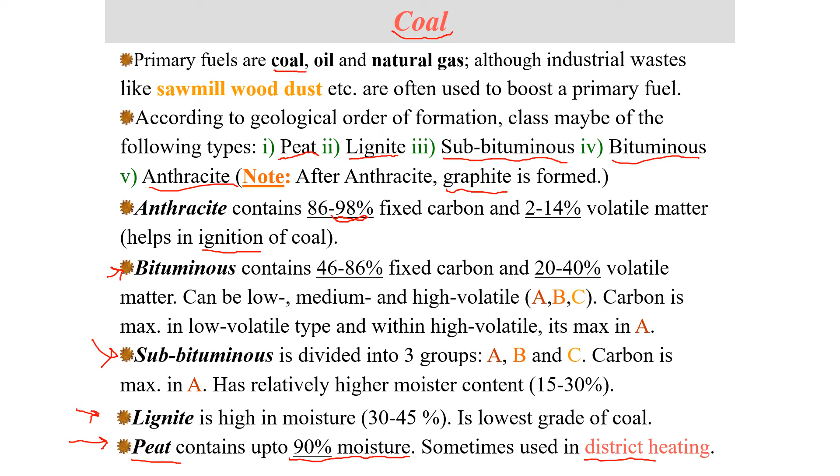So this is peat. If it is dug, it is used for district heating. Lignite is something which is used in steam power plants, but it is still a very poor quality of coal.

It then goes through processes of dehumidification, and it is used in a lot of industries. Pakistan generally has lignite and subbituminous type of coal, commonly being mined here. So the coal content is here, but it's not of a very good quality, and this kind of coal also produces a lot of sulfur and other harmful products.

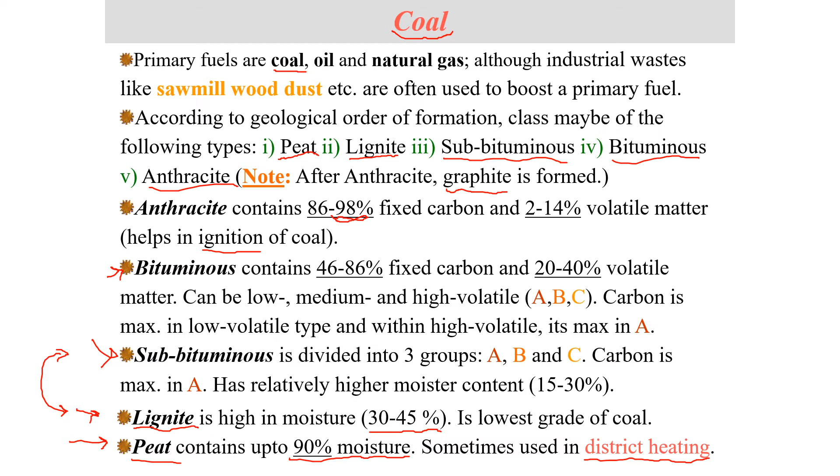So you can see the different types of constituents which are present in coal. The primary thing which defines coal is fixed carbon. If a substance does not have fixed carbon in it, it is not coal. So generally we define coal as starting at 30% carbon, which is lignite.

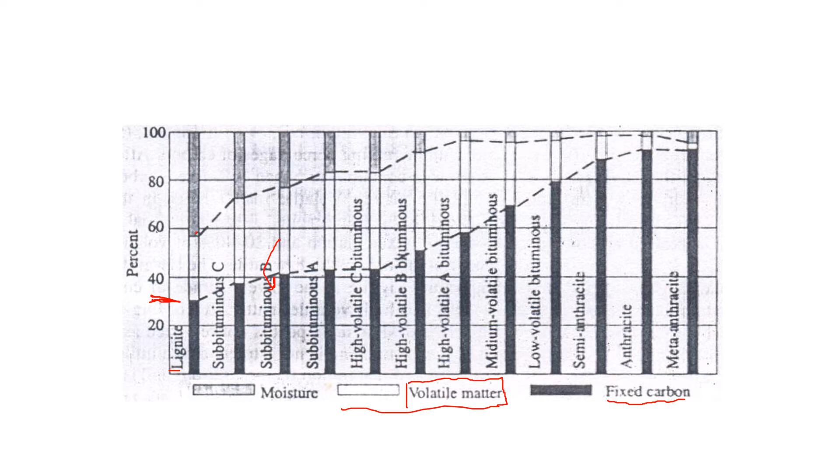Then the second part is volatile material. Volatile material is something which is combustible, like sulfur compounds or carbon compounds, but they are present in a separate arrangement. There could be hydrogen in it, or anything else. These volatile materials actually help burn the coal, so when you ignite this material, it ignites the coal as well.

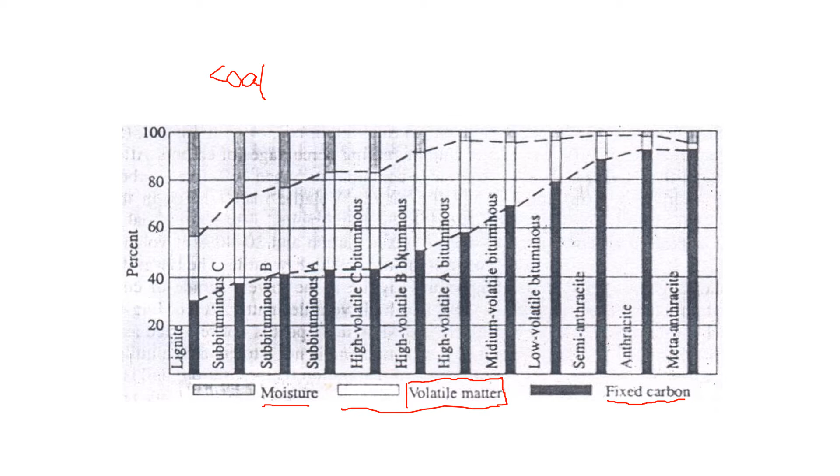And lastly, you have moisture. Moisture is present in coal because coal actually comes from trees. So any tree or organic material, any living material, has moisture in it. Moisture is present, and it starts to decrease as the age of the material starts to increase.

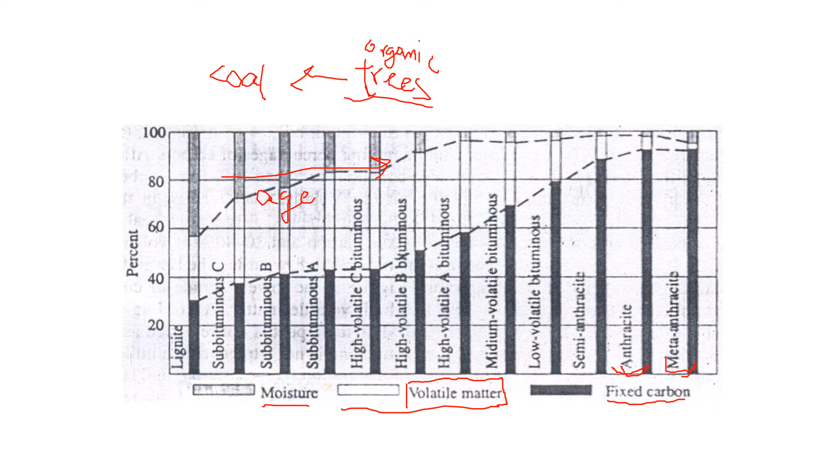So you can expect anthracites and meta-anthracites to have a lot less moisture content, because a large percentage of the material is carbon. And you can expect the low quality coals, like lignite, to have a lot of volatile material and a lot of moisture as well.

So in these cases, you actually need to put these in a dehydrator or dehumidifier, and you need to remove some of the water content, because this water content will actually restrict combustion in the furnace as well.

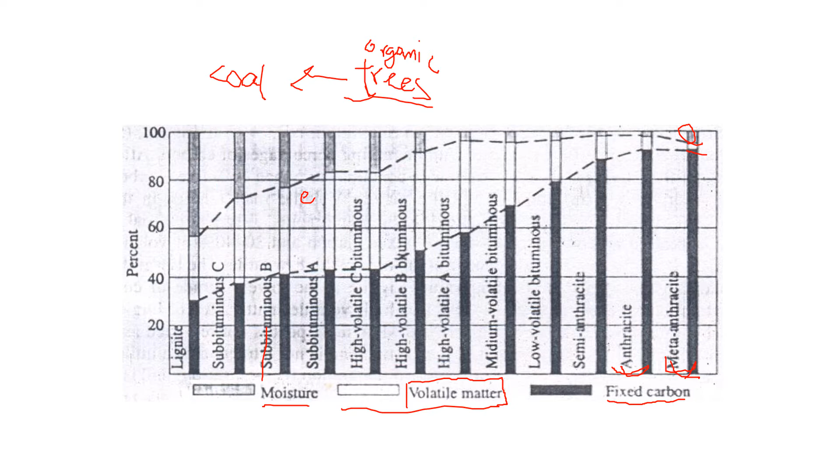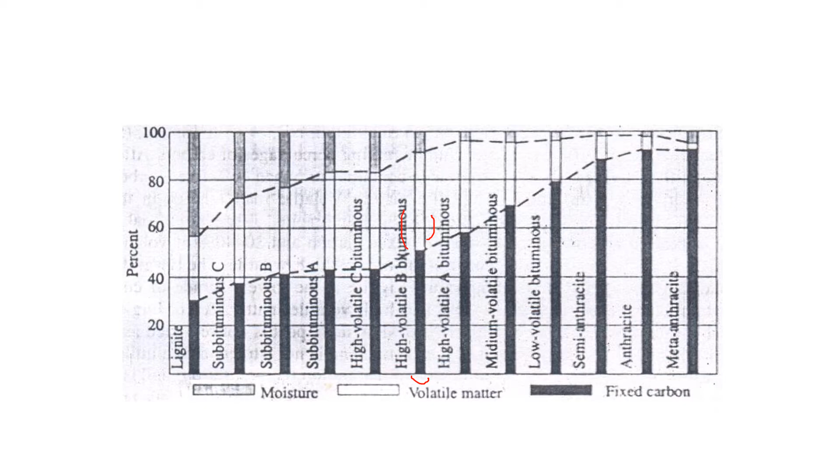So when we acquire a new shipment of coal, we are interested in how much carbon, volatile material, and moisture is in the coal. So what we do is we analyze the coal for different materials. There are two types of analysis: one is the proximate analysis, one is the ultimate analysis.

Proximate analysis you have seen earlier as well. It was how much fixed carbon, how much volatile material, how much moisture, and how much ash.

As I've talked earlier, volatile material is not fixed carbon, it is not elemental carbon, but it is something which is also easily burning in the system. For example, it could have CH4, or other material present in the coal that is not fixed or elemental carbon, it could be hydrogen or anything else.

Moisture is simply H2O, you know that. And ash is the residue which is left after you burn coal. When you burn a specific amount of coal, all the material left in the system is ash, and you have to remove that ash when you need to refill the coal.

This is the easiest way of finding out how much of this coal is ash: you just completely burn this coal at 720 degrees Celsius. 720 degrees Celsius means all of the moisture will be evaporated, all of the volatile material will burn, and all of the fixed carbon will burn as well, leaving only ash in the system.

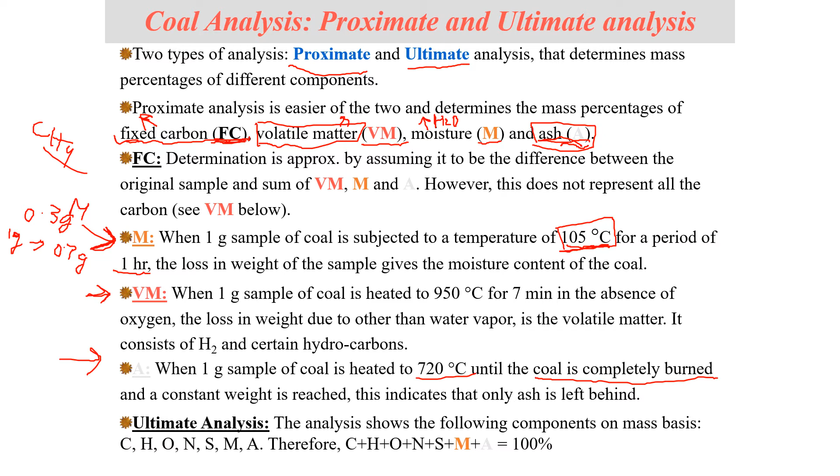When you want to find out the volatile material inside this coal, you take this sample which has lost all of its moisture, and you put it at 950 degrees Celsius for 7 minutes in the absence of air. That is important, because if you add oxygen to it, the coal will burn and you will lose both the volatile material as well as the fixed carbon. So when you remove oxygen from the system and only heat it at 950 degrees Celsius, the volatile material evaporates and goes out of the system.

When you have taken out ash, volatile material, and moisture from the system, then you just get the fixed carbon. So you can see that if you take out ash, moisture, and all of the volatile material, then you are left with carbon, fixed carbon, in the system.

Up till this point, this was proximate analysis. In proximate analysis, we are not concerned about what is the composition of this volatile material. But in ultimate analysis, we are concerned about the different materials. So now we actually find out what the molecules were and what percentages they have. We just talk about moisture and ash, although you can separate this moisture into hydrogen and oxygen as well.

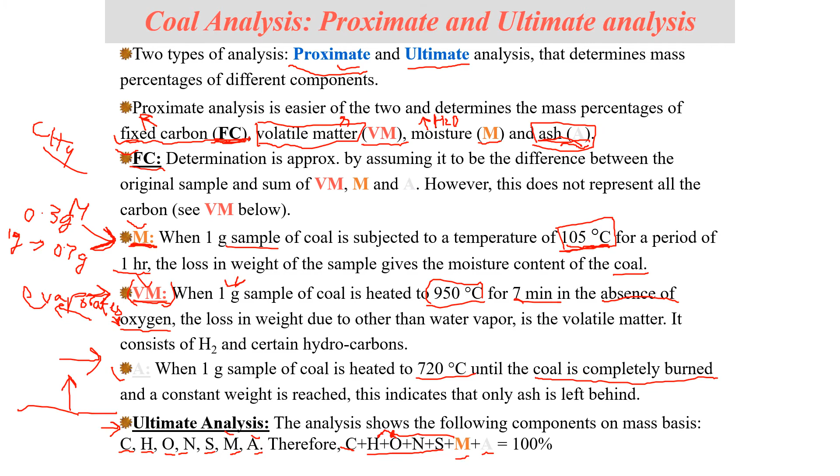So now when we have the composition of coal figured out, we are interested in the combustion equipment for burning that coal. We generally have four types of furnaces for coal: fuel bed furnaces, pulverized coal furnaces, cyclone furnaces, and fluidized bed furnaces. We will talk about what their constructions are like and how the name tells us what the combustion process will be like.

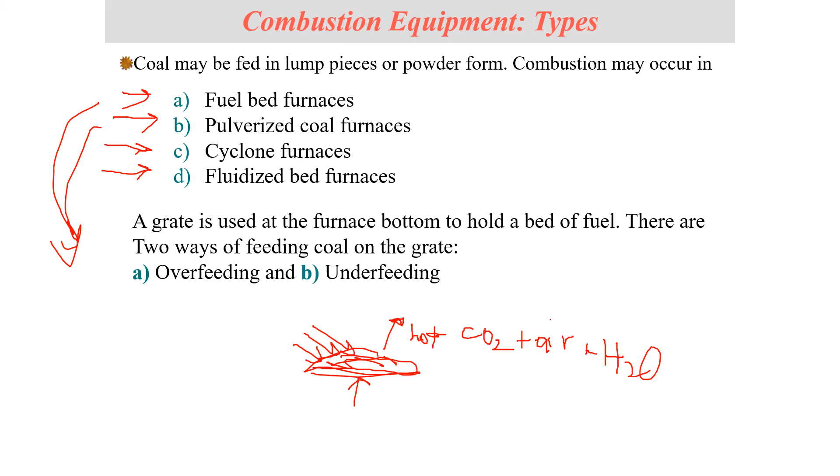In a fuel bed or pulverized coal furnace, we have a furnace bottom, like a bed, and we are just dumping coal over it. You get fresh air, and the combustion happens here, and you get hot CO2 plus air plus other components like H2O, whatever you have, plus etc etc, but mostly carbon dioxide and the excess air you get.

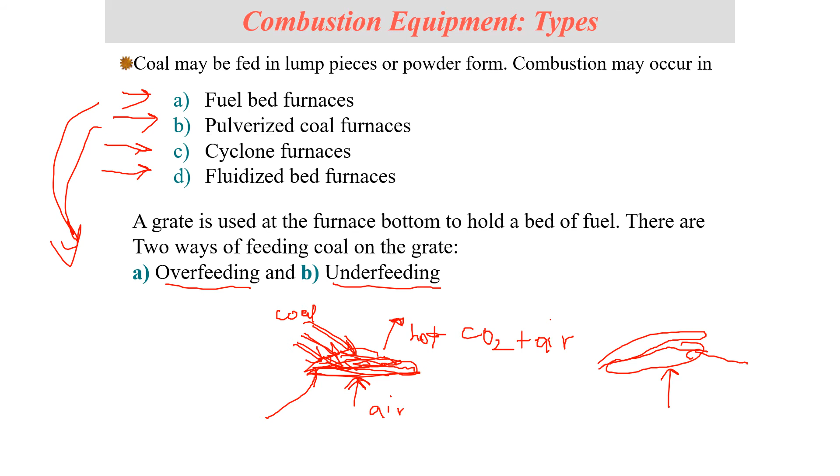If you are dumping this coal over an older bed of coal which has air passing through it, and you dump fresh coal over this old bed, this is called overfeeding. And if you try and ram this coal under the bed of old coal that has already burnt in the air, adding fresh coal under this bed, this is called underfeeding. There are different mechanisms for both overfeeding and underfeeding, which we will check later in the slides.

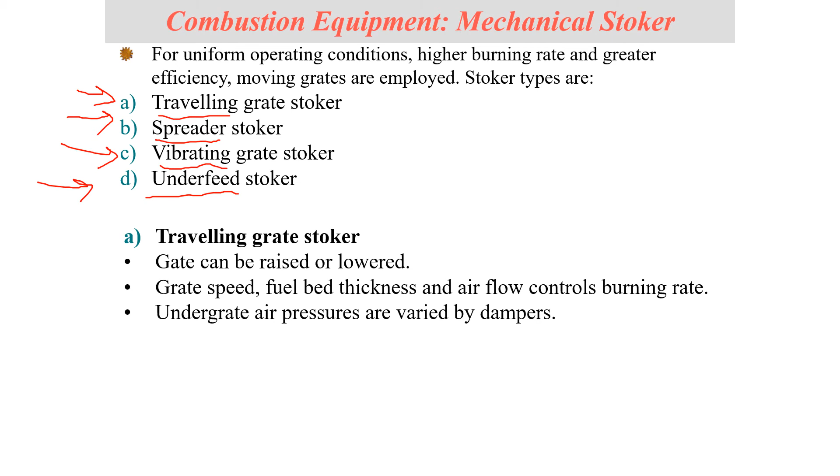Now we will start with the mechanisms for feeding coal. The first kind is called a mechanical stoker. There are different types: traveling grate, spreader stoker, vibrating grate, and underfeed stoker. Underfeed is the example where we try to add coal under the bed of existing coal, so that air interacts with the fresh coal before it passes through the older layers. All the other examples, especially the traveling grate, the spreader stoker, and even the vibrating grate, are all overfeeding examples, as you will see in later slides.

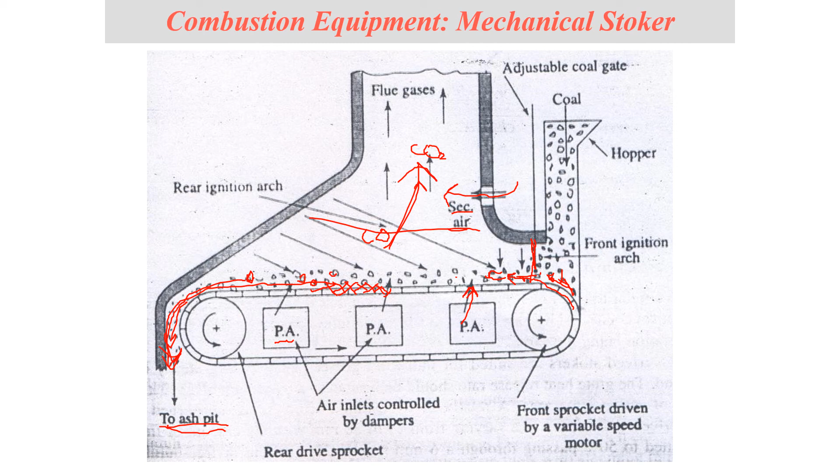Also, it allows some of the ash to flow into the flue gases as well. So this is a very simple process, but it is not a very modern design, and it does not allow you to vary the speed of combustion by a lot. This is just a very specific system which is a little inefficient as well.

Then we have another kind. You can see that in the last design, you will have a large quantity of coal at the initial part when the conveyor is moving, and at the end part, the air will not find a lot of fresh coal to actually burn. So here, there is another type called a spreader stoker.

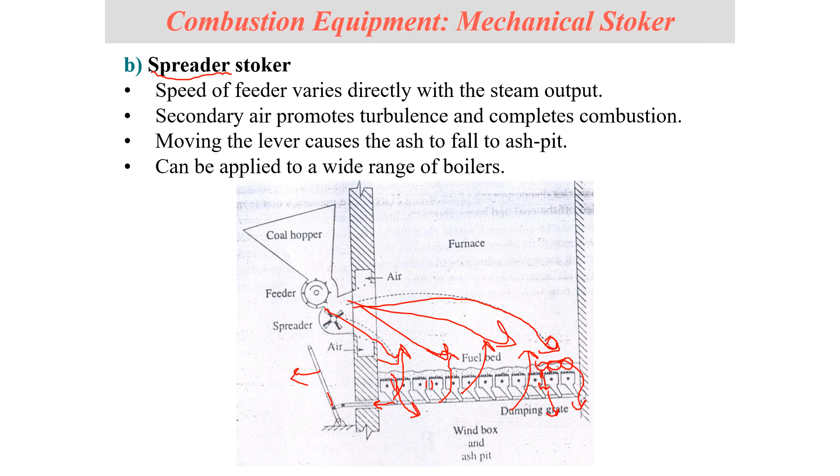These rely on large chunks of coal, and they are a slow process to produce heat at a constant flow rate, which is fine as far as your applications are concerned, but they are not designed to be very proactive or very efficient. They are just simpler systems.

The third type of stoker is a vibrating stoker. What the vibrating stoker does is it basically vibrates the fuel bed. For example, you have a large amount of coal and a large amount of ash deposited everywhere. So this vibrates the bed, so that coal material actually gets out of the ash, and the ash gets dumped into the ash pits.

So, if the boiler load is large, then we have a different amount of vibration depending on what the fuel intake is. If the boiler load is low, then we might not need a very large frequency or amplitude of the vibrations, because the fuel bed is very small.

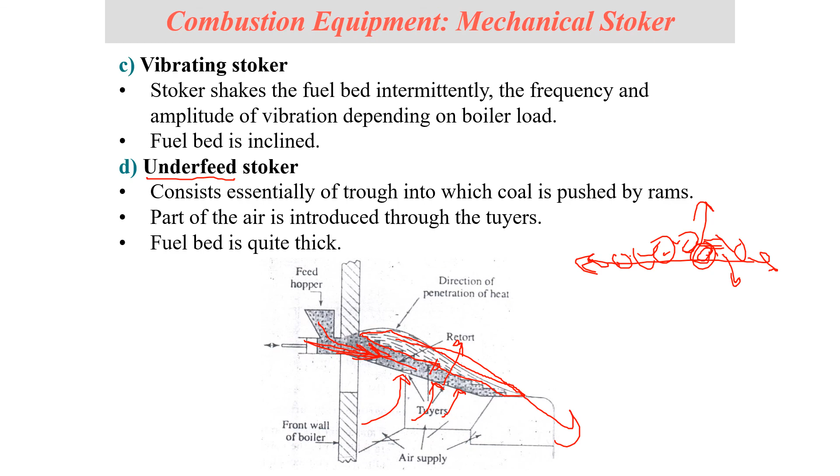So these were the types of stokers. Stokers involve large chunks of coal. Now we will discuss pulverized coal furnaces and how they are different, and then we will talk about cyclone furnaces and how they are installed.

So hopefully you will look at different examples of coal furnaces and the feeding mechanisms through your book, M.M. El-Wakil, and also search online for mechanical stokers in coal combustion to see different types of combustion beds. We will talk about how the coal size changes in the coming lectures, what kind of bed requires what kind of coal, and what coal size. But right now, just review the different structures of the coal beds and coal furnaces, and we will have a discussion about it in the interactive session. Goodbye.